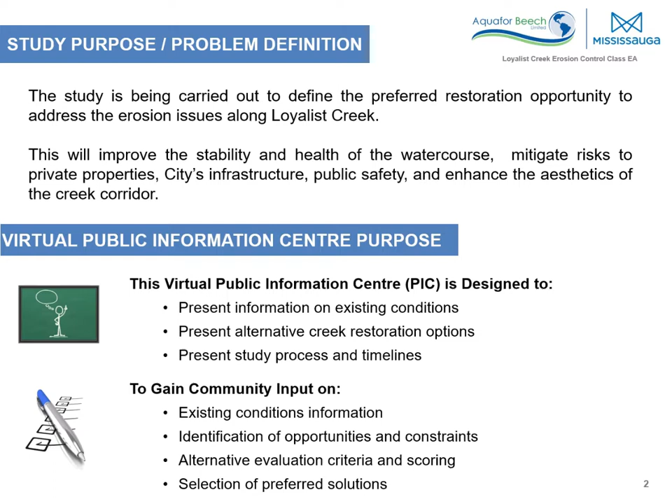Following the municipal class environmental assessment process, this study will follow the Schedule B classification. That includes two phases of study. Phase 1 being to identify the problems, which have since been completed, and phase 2 is to look at alternative solutions to address those problems.

At the present moment, we have identified the problem, provided our first point of public consultation to complete phase 1, and with an understanding of those problems, we've identified alternative solutions. We've inventoried the natural, social, and economic environments relevant to the study area. We've looked at environmental impacts, mitigation measures, and defined what alternatives may be applied to address those problems.

As part of this virtual PIC, we are reviewing our findings to date with the public, after which we will then be able to define the preferred alternative. The study will then be posted with a notice of completion to agency and the public, and then implementation will occur thereafter.

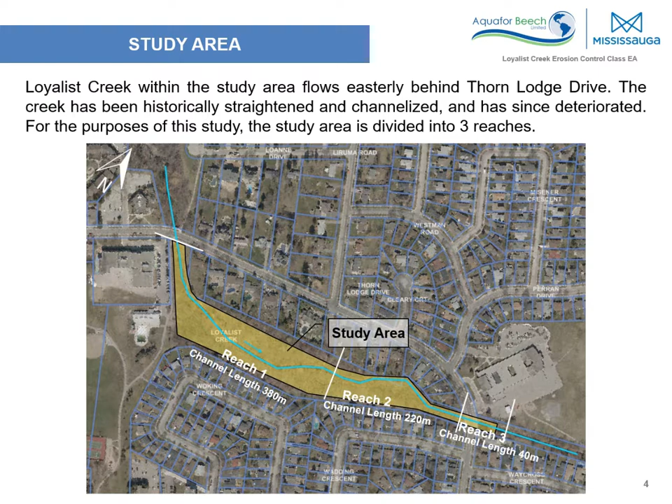The study area figure presents the extents in which Loyalist Creek and the adjacent corridor are being investigated. The upstream limit on the left of the study area figure is the Thorn Lodge Drive crossing upstream. The creek setting then extends primarily through the city-owned corridor, which includes a multi-use trail network, and extends downstream, once again crossing Thorn Lodge Drive to the right, and has extended downstream of Thorn Lodge, in which we've further divided the study area into a series of reaches, referred to as Reach 1 upstream, Reach 2 in the middle, and Reach 3 downstream.

Some photos have been included to help define what the existing conditions of the watercourse are. Photo A presents the upstream limit of the study area, where the watercourse extends downstream of Thorn Lodge Drive, coming through a box culvert. Photo B presents that multi-use trail, which has been newly paved and extends along the outer edge of the city corridor.

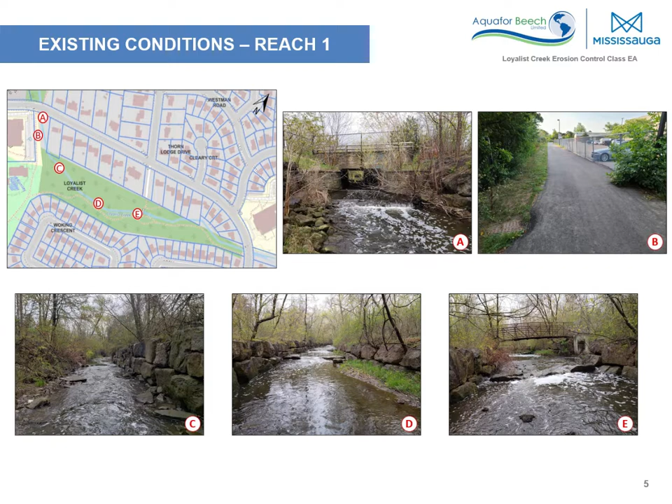Photos C, D, and E present the variety of conditions throughout this reach, Reach 1, the upstream reach, primarily lined with armor stone or large blocks of stone which have been quarried from the natural environment, used as erosion control to prevent the creek from migrating or erosion.

This slide presents the existing conditions observed within Reach 2. Photo F presents a change in trail setting, going from asphalt to more of a wood chip surface. And then photos H through I and J illustrate a different type of erosion control measure, referred to as gabion baskets. We see in photos H and J in particular that the gabion baskets have completely failed and are starting to fall into the creek and may potentially obstruct the flow and leave the private properties or the properties behind the gabion baskets subject to increased rates of erosion.

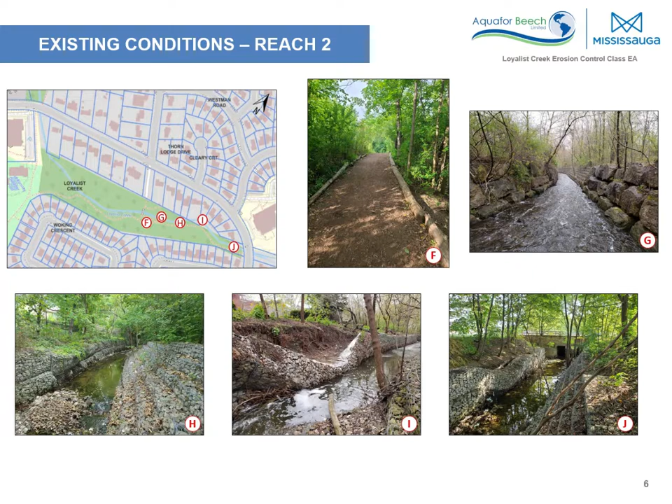Reach number 3, downstream of Thorn Lodge, illustrates the watercourse, particularly with regards to photo N, a large mass of material which has deposited. This mass of material has washed downstream from those failing gabion baskets which were observed within Reach 2.

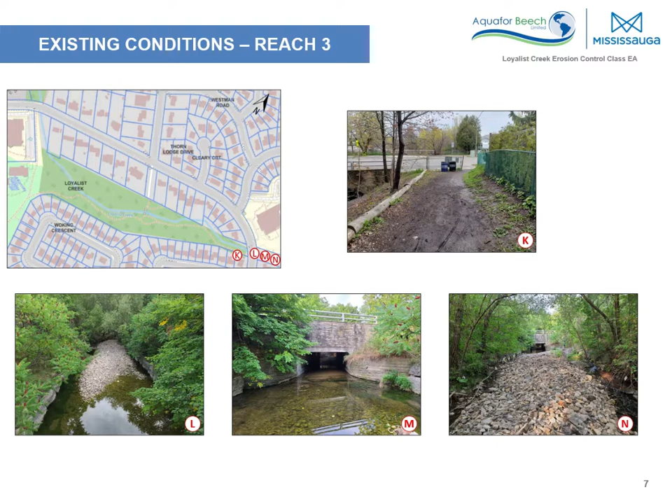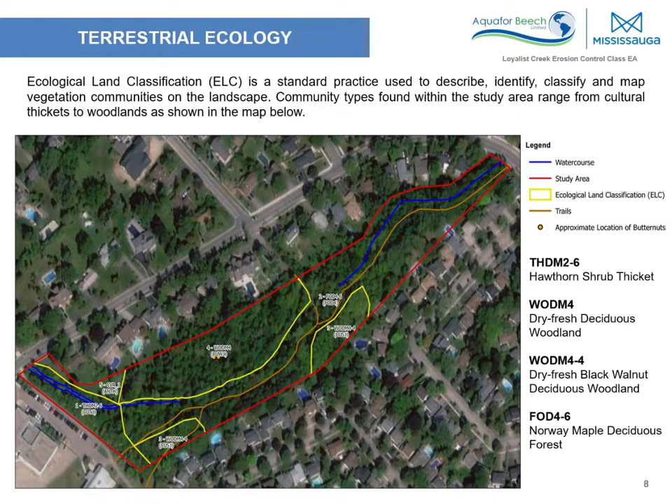As part of defining the existing environmental conditions, the terrestrial ecology of the study area was identified. We see that an ecological land classification was applied, which is a standard practice used to describe, identify, and map vegetation communities on the landscape. Communities observed included hawthorn shrub thicket, dry-fresh deciduous woodland, dry-fresh black walnut deciduous woodlands, and Norway maple deciduous forests.

Additionally, the existing aquatic ecology was investigated. At present, fish were not observed to be found within the study area. Although there are no major fish barriers within the site in particular, there are fish barriers known downstream, preventing opportunities for migratory fish to enter into the study area.

The habitat within the study area is generally in poor condition, largely due to the historic engineering practices of the gabion baskets and armor stone bank linings. Aquatic habitat may potentially support local communities or vagrant species. However, it may be improved through the restoration as defined within this EA.

The hydrology and the hydraulics of the study area were also investigated. Presented within the figure are the extents of the Regional floodplain. We see that the Regional floodplain limits are generally confined to the Loyalist Creek corridor. However, there are noticeable exceptions, with 8 private properties within the floodplain, highlighted with the red boxes. The Regional flow extending through the study area would be over 67 cubic meters per second of water.

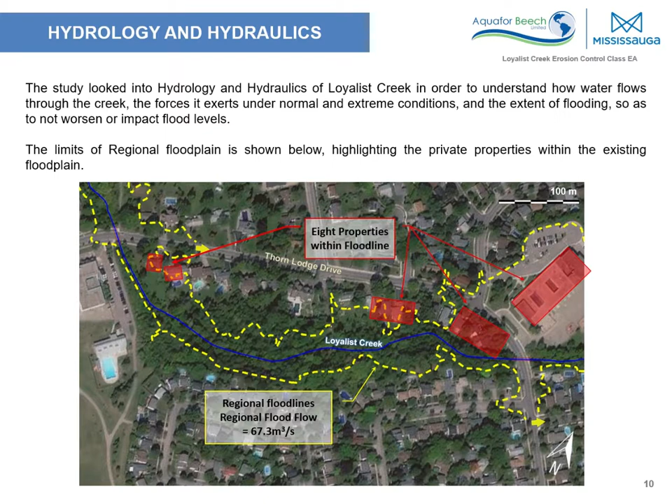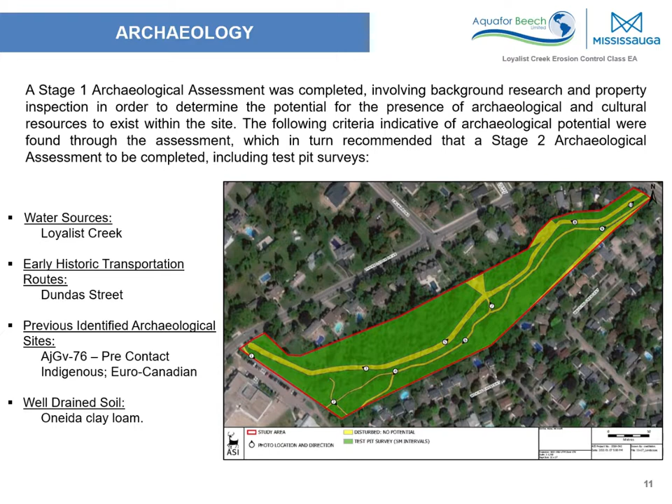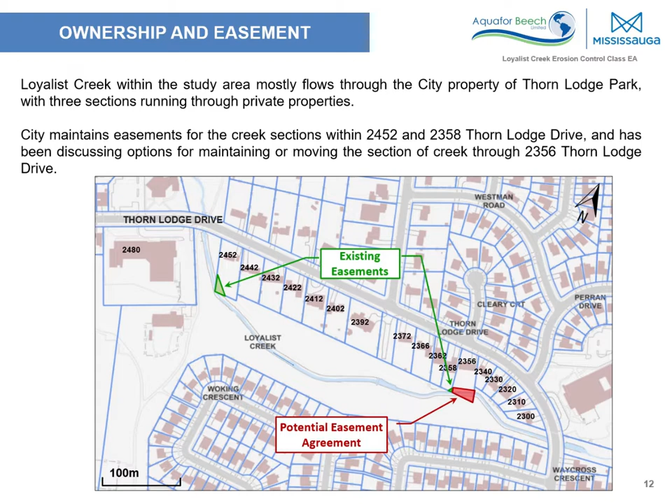It is also noted that the existing creek alignment extends primarily through City of Mississauga-owned lands. However, there are 2 properties on Thorn Lodge Drive where the watercourse extends through the private properties. To undertake any works on private property, the city would need to gain an easement or a permission to enter.

In order to define the preferred alternative through an EA process, there are a range of different criteria that are applied. These criteria include physical and natural conditions, social and cultural criteria, technical and engineering criteria, as well as economic criteria. Each of these 4 groups of criteria are then applied to the alternatives that are considered for each one of the reaches.

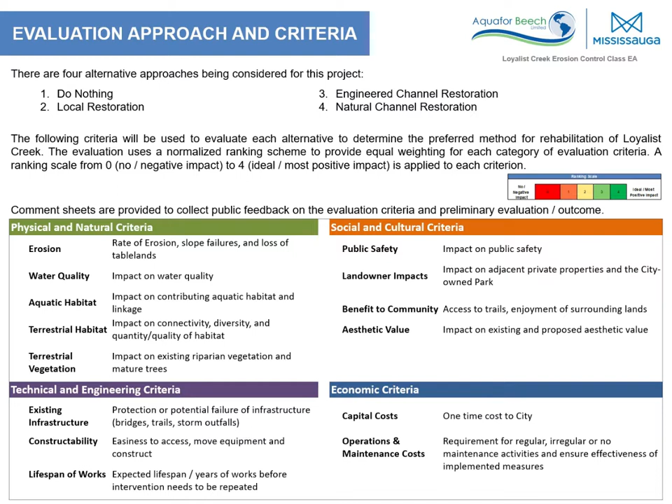For each reach, a series of alternatives include the do nothing option, doing spot repair or local restoration, the third alternative being an engineered channel restoration approach, generally not moving the channel from the existing planform arrangement, or natural channel restoration, which involves restoring the channel to a condition of what it would have been prior to the existing.

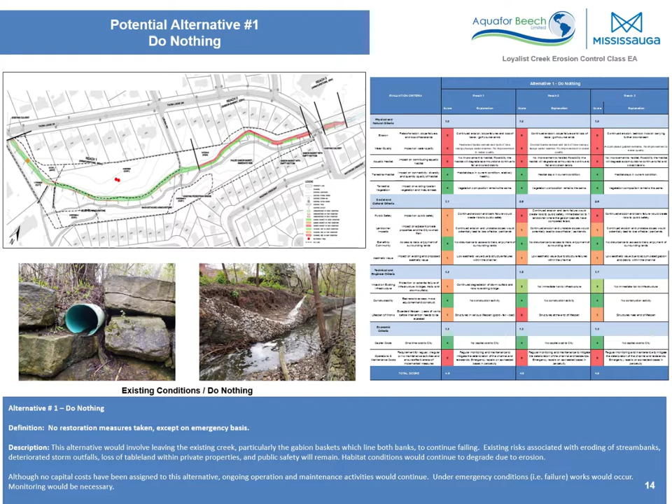The do-nothing alternative involves no restoration measures being undertaken, with the exception of an emergency basis. The existing gabion basket and armor stone erosion control measures will remain in place and continue to deteriorate. Scoring for this alternative is provided within the table to the right.

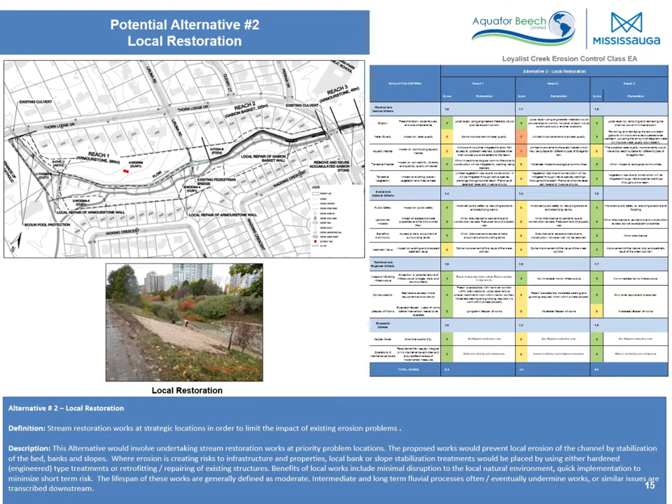Local restoration was also given consideration for reaches 1, 2, and 3. What local restoration would involve is addressing the site-specific issues without major impact to the overall condition of the watercourse. A score of 6.8 was applied to reach 1, a score of 4.8 applied to reach 2, and 6.8 applied to reach 3 for local restoration.

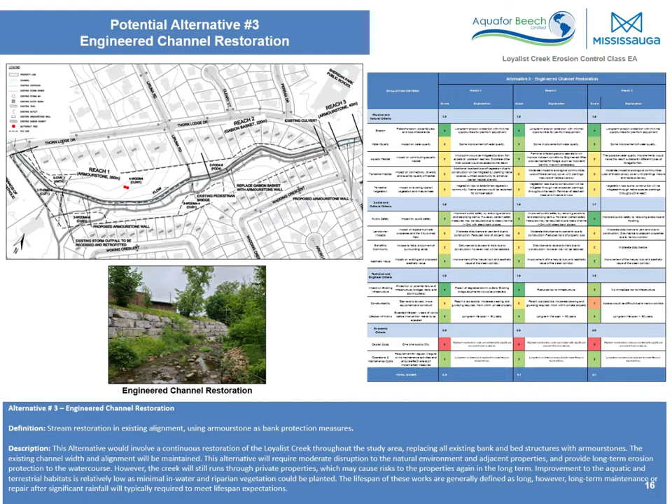Engineered channel restoration would involve removing the existing armor stone and gabion baskets and rebuilding it within the present alignment. Scores of 5.9, 6.1, and 5.7 to reaches 1, 2, and 3 were defined for engineered channel restoration. And lastly, the natural channel restoration was applied. Reaches 1, 2, and 3 were scored at 6.6, 6.1, and 6.2.

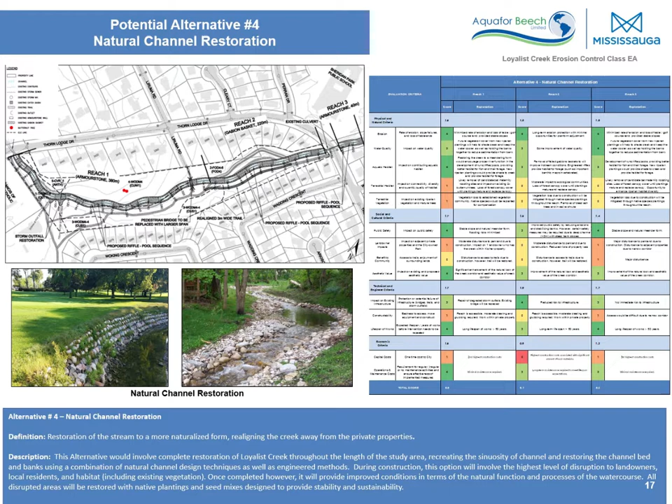Taking the highest score for each of the reaches, we're able to define what the preliminary preferred approach may be to move forward with recommendations for the EA. The highest score for reach 1 was the local restoration score. That would mean that stream restoration works occur at strategic and priority locations. At reach number 2, natural channel restoration received the highest score. That would involve continuous restoration of the entire reach. And reach 3, the highest score received was the local restoration score.

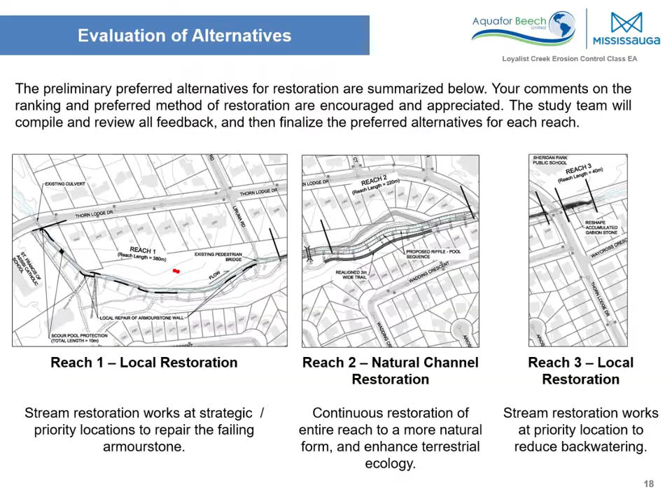In terms of next steps moving forward through the EA process, we are presently undertaking the Phase 2 public consultation. Comment forms are available through the city's website, and we look forward to receiving those comments over the next 4 weeks. All comments will be compiled, reviewed, and the preliminary preferred alternative will be adapted to ensure that each comment can be incorporated, given consideration, and addressed.

Upon completion of the public consultation process, the EA project file report will be posted for a 30-day review period, at which point key stakeholders and public, such as yourself, will be allowed to provide comment with regards to the project file report. With completion of the project file in the EA, the study will move into detailed design, followed by implementation, which will be construction of the preferred alternative.